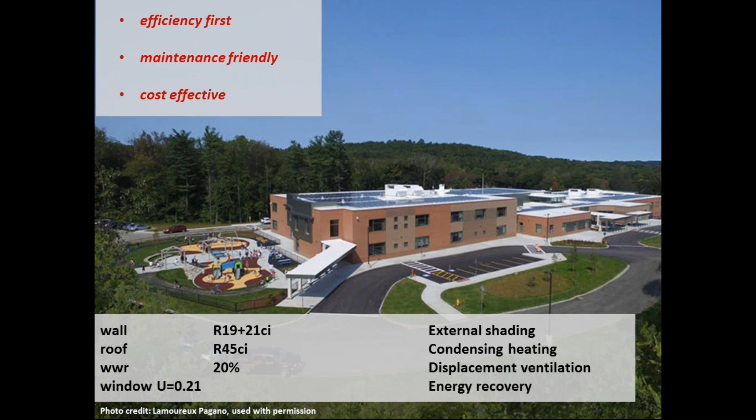And then the key change they made was in the envelope. You can see that they have a wall that's R-21 continuous insulation. The roof is R-45 continuous insulation. At the time, code roof was R-20 continuous insulation. So this envelope is literally two times better than what code requires.

So I just want to reinforce that this design team did something quite different than a code building. They didn't make this incrementally better, which is kind of what you get when you do LEED something. And they didn't go to the same old design processes that were the usual go-to strategies for zero energy back then.

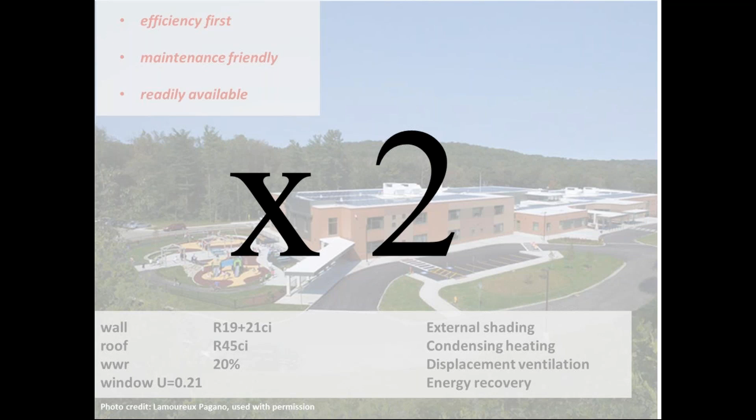What they went to were new strategies, and primarily a ×2 better envelope for the next one. And so you ask yourself, well, is that cost effective? And the answer is absolutely. And that's because it's absolutely going to cost you more to have an envelope that's twice as good.

But this is the benefit of an integrated team, because the integrated team was modeling the performance of that building with the better envelope, the ×2 envelope. And then they were taking a look at the HVAC systems that they actually needed. And what they found was they could downsize their HVAC system equipment and actually eliminate systems like perimeter radiation. And because they're all on one design team, they're able to hand that off to the contractor, again, back in the early design phases, and say, hey, it turns out our HVAC systems can be smaller. Are there any cost deducts?

So under zero energy generation 1 with the old go-to strategy, everything was just a cost add, cost add, cost add. In this case, with the strategy of more envelope, there's this cost add of envelope, but this cost deduct of HVAC. So that's how they resulted in a net only a little bit more, and you can see the concept there in the plot.

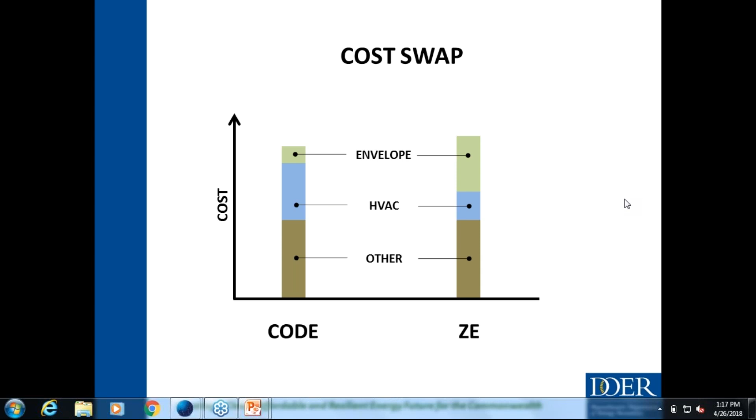So the go-to strategy of version 2 with lots of envelope is an effective strategy if your mission is low maintenance, because then you're allowing the system of the wall and the windows to do all the heavy lifting for you, and those systems have no moving parts that can break. So that's the way you want to go if your value is low maintenance.

So the 4th priority was to maximize the use of the roof for renewable energy. And the city of Worcester was very experienced at this because they've been working to maximize their rooftop solar on all their existing and new construction buildings. And in this project, there were rooftop solar plans that were made showing where the solar PV would be way back at the schematic design. It was not an afterthought.

And as a result, the HVAC systems for a middle school type building, which includes a lot of rooftop appurtenances, were consolidated to certain areas, and they didn't unnecessarily clutter their roof with HVAC equipment, allowing a lot of contiguous space for PV. So in this case, Worcester was able to put the PV on and buy the systems.

Your building project may not have budget for the PV systems, but it would make perfect sense still to allocate the space for some future PV, even if you weren't going to build it in the first go around.

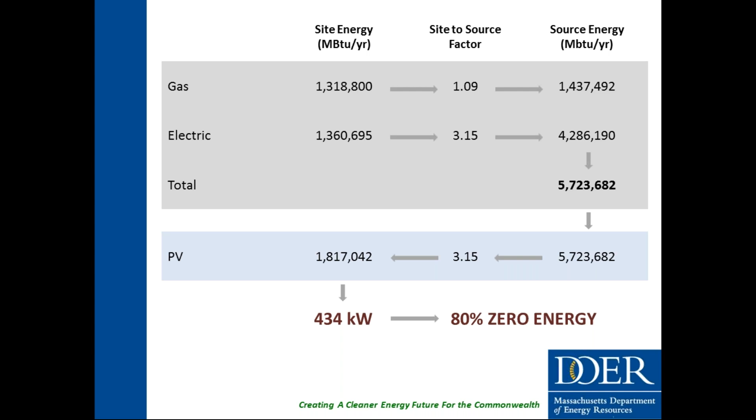So, looking back, generation 2 type zero energy as opposed to generation 1 type zero energy is quite effective. And this is that story: you might be closer to zero energy than you may ever know, especially with the generation 2 strategies.

So to put that into perspective, if they were to build this school to code, the school would consume about 8.5 million BTUs of source energy per year. And this school took advantage of Mass Save incentives to do that times 2 envelope and some improvements to the HVAC, and they're able to cut that energy consumption by about 1/3.

And then they're able to do the rooftop PV to take it almost the rest of the way down. So the school that was actually built uses an energy consumption that's way down there. And again, much closer to a zero energy school than anyone ever thought possible, and certainly not even close to a code school.

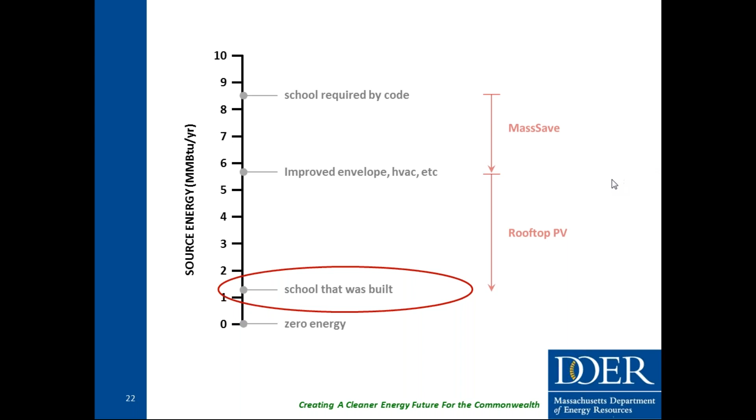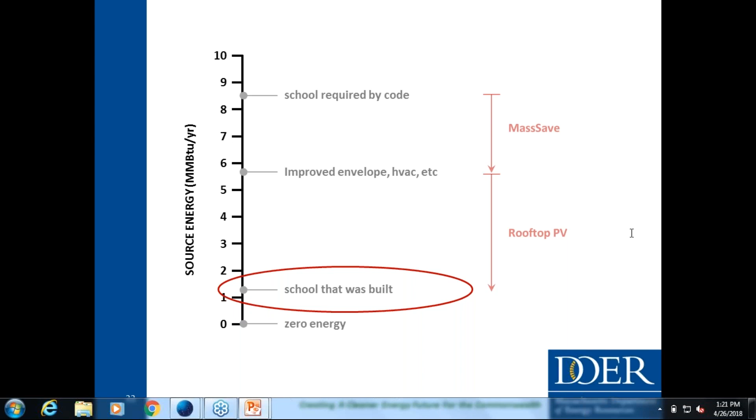So I just want to stress, this is not an incrementally better school. This is a school that is off the charts better than they would have gotten if they built it as a code school. And again, this team wasn't even trying to get to zero energy as a specific goal. It was what they ended up with by pursuing the most cost-effective strategies they could think of. So think about that the next time you're doing your zero energy school. So let's go to the next slide. Or any building, not just school.

So I have just 2 more slides, and then we'll hand it over to Sean to give us a run-through on Mass Save incentives for energy efficiency. So this is a screenshot of a spreadsheet tool that the DOER built last year that provides a way for an owner of any sort, city planners, architects, to examine the basic framework for how close your building would be to zero energy, what it would need to do to be zero energy, how much we can get out of the solar system for a given roof size, and it maps in the most basic things.

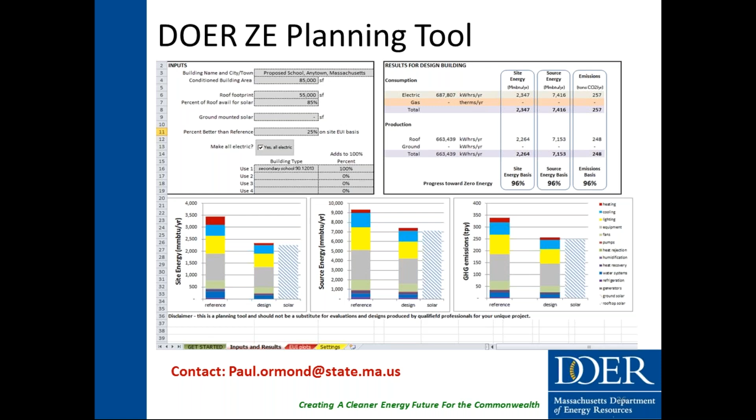It literally takes about 15 minutes to come up with all the key parameters that you'd want to know and ask of your consultants, and it helps you know what to expect. So if you're interested in something like that, my contact information is there, and I can send you the spreadsheet and give you a little tutorial of how it works. And then the next slide.

So thank you so much for sharing my story, and I'll hand it over to Sean at this point. Great, thank you, Paul. So I just wanted to run you through a few things and how our Mass Save incentives will be able to assist you if a zero net energy or a zero net energy ready project is part of your goal.

Just to re-emphasize a lot of what Paul said. The mindset was really to jump first to those systems and energy design, different areas and characteristics that go into the design for a building. They think, oh, we're going to need a really super expensive variable refrigerant flow system and tons of renewables. And there are ways that you can really break this down into little buckets to take a look at each piece and see where you can get your wins and drive down your energy use intensity in these different areas.

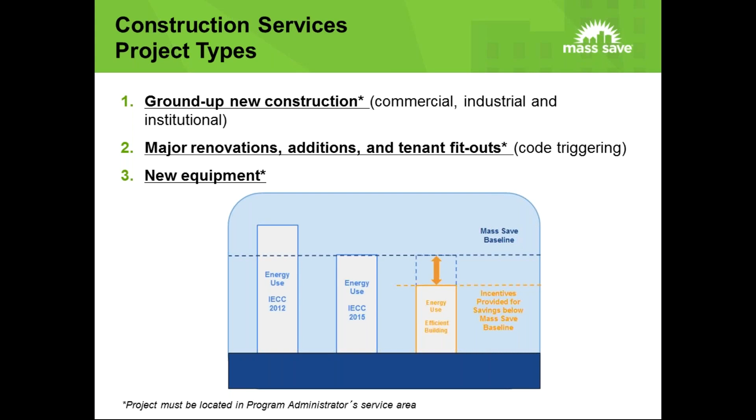So there's a few different pathways that you can go through for the new construction program. For a zero net energy building, we definitely want to get you on that whole building approach for buildings above 20,000 square feet. If it's below 20,000 square feet, we do have a systems approach with some custom calculations, but it wouldn't be a whole building model like I just described. But certainly the majority of renovations and new construction projects in your town are probably going to be between 20 and 100,000 square feet.

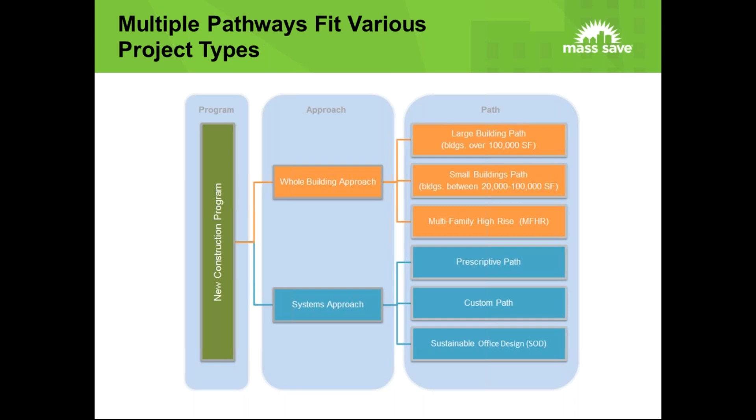So there are a few different paths. Certainly, if you have some schools like Nelson Place, that would be over 100,000 square feet, and we can talk about the differences between those. They're incentivized a little differently, and the programs run a little differently. So there are some intricacies that we'll get into. So again, the emphasis on an integrated design and really getting everybody to the table early.

We do offer two different levels of incentives. So you'll see a timeline on the bottom there, and you have your pre-design when you're really trying to think about, okay, we have this need for this school, and you talk to an architect and hire an owner's project manager, and they start to come up with a program for this building to satisfy your town's needs.

So we really want to get into that integrated design, which would really start just before schematic design, and then goes through design development. We would still be able to support your project if it was getting into construction documents, but not to the same level that we would if it was earlier in the integrated design.

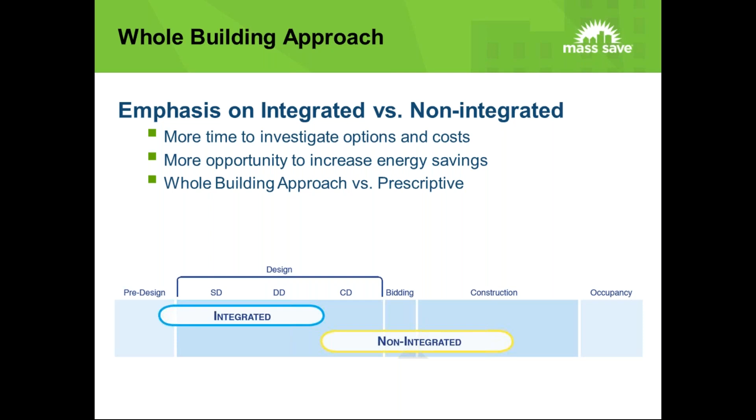And I can't stress enough, doing those multiple iterations and having that time to really take a look at all the options on the table and point the compass needle in the right direction and make smart decisions early would be a big help to meet your goals. So it's a little bit of a breakdown just for those new folks to let you know some of the incentives that are available when we calculate that incentive for you.

So any savings on the electric or gas side, it is tiered for Eversource service territory. There are some differences between the different program administrators. So if you're out in the center of the state in Worcester County, typically, just so you all know, the electric service territory for the Mass Save program generally takes the lead on doing the consulting and the technical assistance.

So if you're in Eversource electric service territory, certainly feel free to reach out to me or some of the other folks on the new construction team, or I'm sure many of you are in touch with Mark Rooney, who's our account executive that handles the municipal sector.

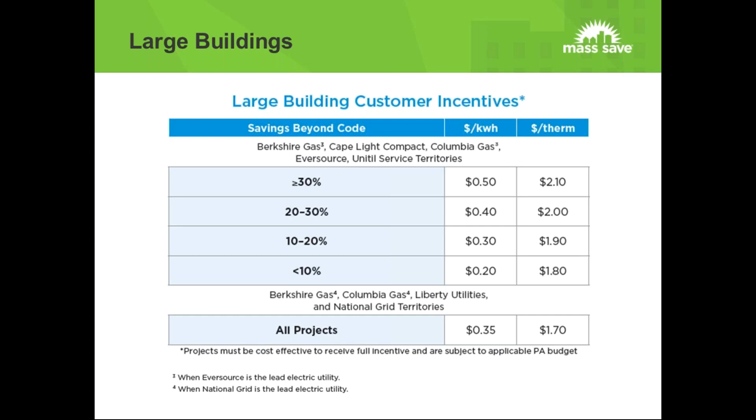So there are also some design incentives. This is for integrated only. That would be paid to your design team. So there is a $3,000 stipend that's paid to the architect, and then they can distribute that to the rest of their consultants that they have as contractors and consultants to them.

So we do for our preferred vendors. Eversource has a list of technical assistance vendors that are preferred that we pre-screen and vet, so we make sure we get a consistent calculation from them, and it's a quality model for our customers. So we do a 75% cost share of those studies that go through our program. That would be capped at $20,000 as well. And typically the studies are less than that, but that's the cost share that we would be able to do for the energy savings calculation.

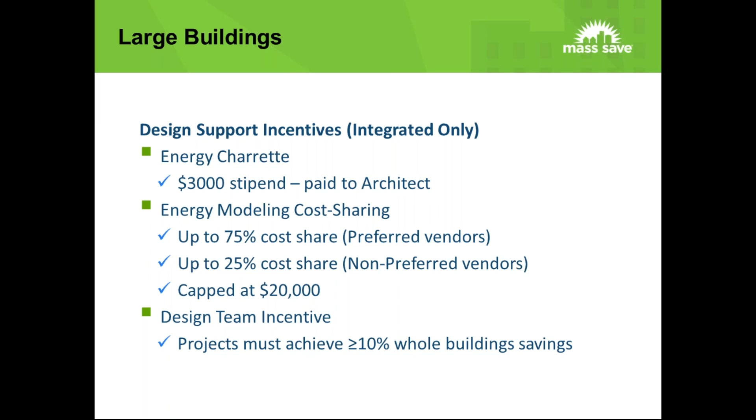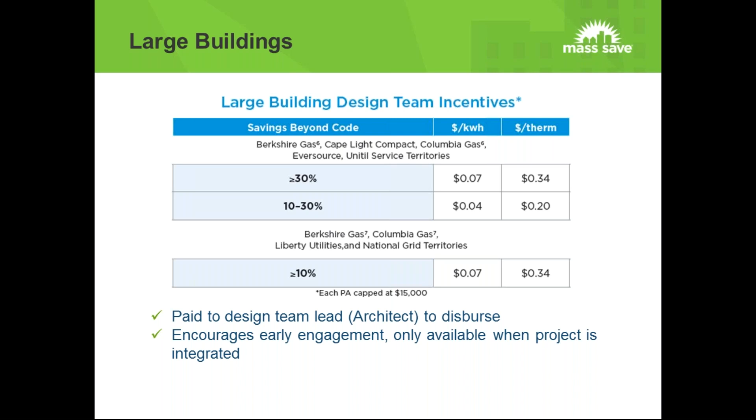So then that design team incentive also must meet a minimum threshold of greater than 10% for the design team to be able to get their incentive, which if everybody here is interested in zero energy buildings, it's going to be way more than that. So this is a little bit of a breakdown of how those incentives are paid to the design team lead. Typically the architect. Sometimes it's the mechanical engineer, but typically it's the architect that's the lead designer on the project. So this is all for the large buildings, which primarily would apply to schools, mostly for municipalities.

We also have a small buildings path. Again, early engagement is very critical. So we do have a number of TA vendors, but Eversource has a bench of 4 pre-selected vendors that we would use for the small building path. So we'd be able to meet with you very early on, run through an energy charrette, get all the stakeholders around the table, and talk about how we can put your zero net energy goals into your project.

As a service to you, our vendor would also be available for any consultation and do a mid-design review to get a third-party review of the design development drawings, making sure that you're still on that path, and if there's anything that needs to be corrected to meet those goals, there's still some time to remedy that.

So the same customer incentive tiers as I showed you before for the large buildings path, if the project is modeled, which a lot of them are and would be for zero net energy projects. And again, similar to the large buildings path, there would be that design team incentive that would be available.

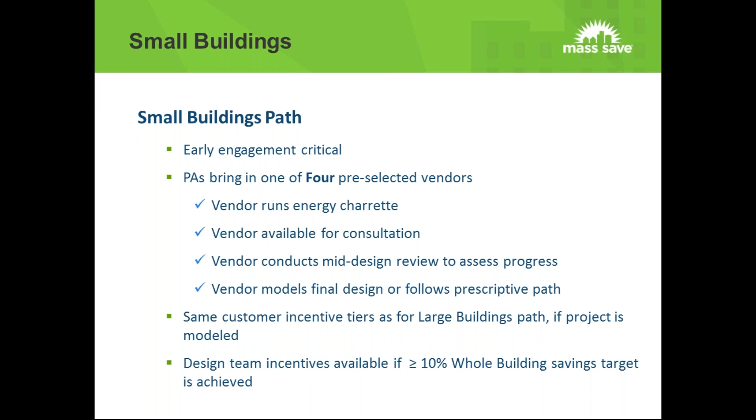So then in Module 2, they'd form a project team. This is typically where the owner's project manager and the design team get formed. And then this goes through the feasibility study, which I'm sure some of you have been through, where it's okay, well, are we going to renovate, put an addition on an existing school? Is there another site that makes sense? You go through a lot of that. And then as you get a little further along, the guaranteed maximum price for the project and the funding is locked in from the Commonwealth for your project.

So I just want to emphasize that when you're forming that project team, that's really when we want to initiate and start the Eversource process. Even though projects can cash flow better and it would help pay down the bonds sooner, once you get locked in with the MSBA process, it's very, very hard to add technologies and see how the incentives available through Mass Save would be able to help you reach your goals.

So we want to be able to, as you're getting started in that feasibility study, see how the Mass Save incentives fit, and do that charrette and make sure that they would be able to help you meet your goals. That way we can get to our step 4 and get a pre-approval letter in your hand. So when you're getting into construction, you know the commitment that would be available from Eversource or National Grid for your project.

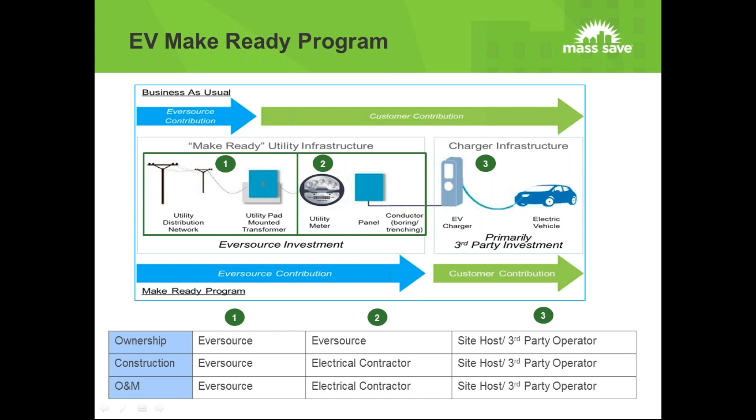One thing that I just want to wrap up with, as Paul said earlier and I reiterated, if zero net energy is your goal, it is something that's certainly attainable. Use the DOER planning tool if you're thinking about a new school or a new DPW garage or public safety building. And then if it does look within reach, using a lot of these free tools, whether from DOER or AIA, put ZNE as part of your goal in your RFP for design services. Make sure it's in there. Make sure that your architect and your design team knows that it's a priority when they're bidding on the project to design your building. And you should be off on the right foot. And hopefully I'll hear from you and we'll be able to help you out with some incentives through Mass Save.